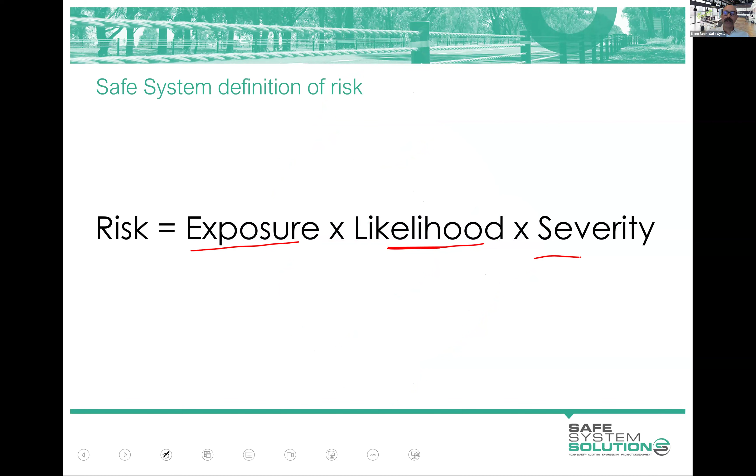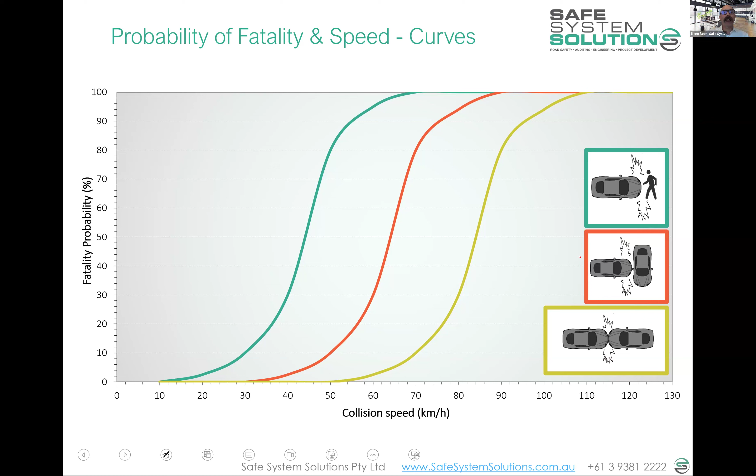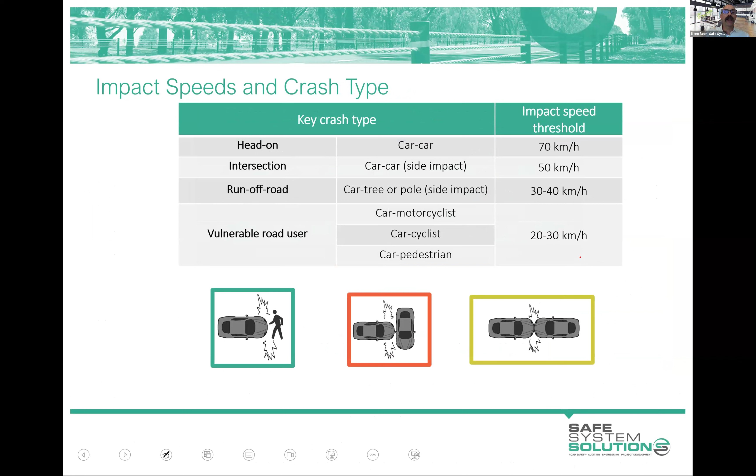When we looked at that severity aspect in my summary, we looked at these graphs and we got ideas of some particular crash types that we were thinking about and how bad they are for humans. And we looked at some different speed angles of vehicle crashes involving pedestrians and cyclists. I've put a few of these at the start of the notes for this module, so you can easily refer back to these as you make calls.

And I also had that colorful chart that we use with some scoring numbers in it, which I will bring up a little later in this module, just to take you back to that, because that's a nice, easy way to start to get an initial feel for how bad a crash is going to be and what we should score it.

So let's get into it. How do we actually do a safe system assessment now? Well, I thought, if Marissa, we have a poll, which is okay if we don't, this was more just finding out, has anybody actually done a safe system assessment before, or have you received one, or do you not know what we're talking about at all?

Is there a poll? It is. Yeah, good. What has been your involvement with safe system assessments? So this may pop up on your screen. If it doesn't pop up on your screen, just write in the chat maybe. How much experience have you had with safe system assessments? From nothing, no experience, what are you talking about now, to absolutely live, breathe, eat safe system assessments, love those, and anywhere in between.

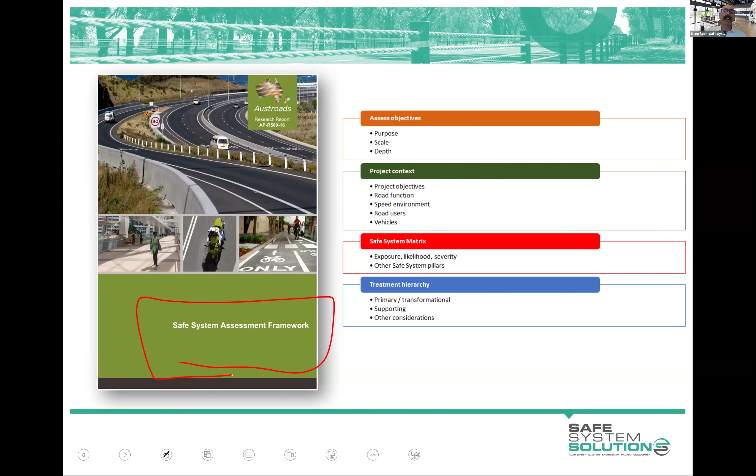Safe system assessments and the process is documented in the Austroads Safe System Assessment Framework, which is a document I wasn't one of the authors of. I was on a working group that was looking at this, and there was lots of different debate about specifics of it, and using numbers or not using numbers, and the like. But in the end, they produced something that hadn't actually been worked through a lot in terms of practical use of a safe system assessment framework, because nothing existed. So yes, they did some sort of mock trials and things like that.

But since the release of that document in 2016, a lot of safe system assessments have been done now, and we've identified some things that probably need a bit of a tweak in this document. There's some industry practice which is slightly different, but generally the document still remains a good source of here's how you can run through this safe system assessment framework.

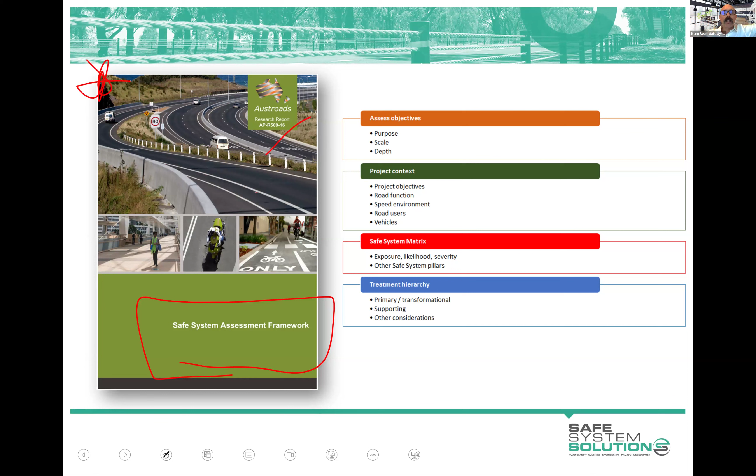So some of the jurisdictions then said, well, thank you Austroads, we like that, and we certainly want to be using it, and we've had practitioners using it for a few years. We're going to put out some guidance to just sit under the Austroads guide, or above it, depending on how you want to do it, just to clarify how we're going to do it in our particular jurisdiction, and clarify anything we don't absolutely agree with the way Austroads says to do it.

So the Victorian government produced the Safe System Assessment Guidelines. Then the South Australian government took the Victorian guidelines and put their own front cover on it, and did a global replace of VicRoads with DPTI at the time, now DIT. Same document, same process, same clarifications, they're the same. So that's become a bit of an industry standard, in terms of from the Austroads document, some particular application aspects. So what I'll be taking you through now conforms with these documents and the Austroads one.

There's been little bits and pieces in Queensland and New South Wales in how things could be done. What we're going to present to you is pretty much industry practice across Australia, and you'll get a template to use, which generally conforms with all of that, so you'll be able to do that for your projects.

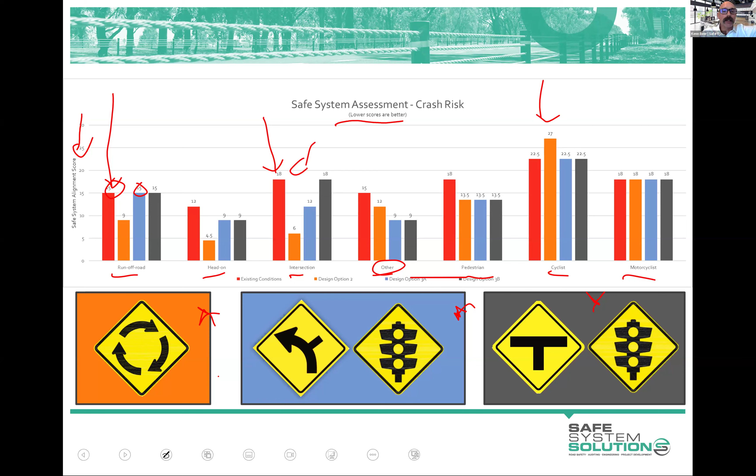So that was what the output is going to be like. Now I'm going to start you on the process journey you would go through to get to the stage of being able to produce that.

The first thing you're going to need to do is sit down with your client and understand their project. Why are they doing this project? What's the current traffic numbers, the current number of pedestrians, cyclists? Have they made commitments to different things? What's the function of the road? What's the speed environment? Are there cyclists in the area? What's the vehicle composition? What's the movement and place categorization? These are just prompt starter questions - these ones happen to be in the Austroads guide. You can ask whatever you want to try to get your head around this project, what they're planning, what they want to achieve, and all of that.

So it's to help you with context. Some of these help you refine your scoring and the production of that graph. Some of them actually help you in the next phase, which is to give them recommendations on how they can improve things. The more you know about their strategic objectives and what they're trying to achieve with this project, the better you can tailor some of your recommendations and things you suggest they have a look into to improve the safety of their project.

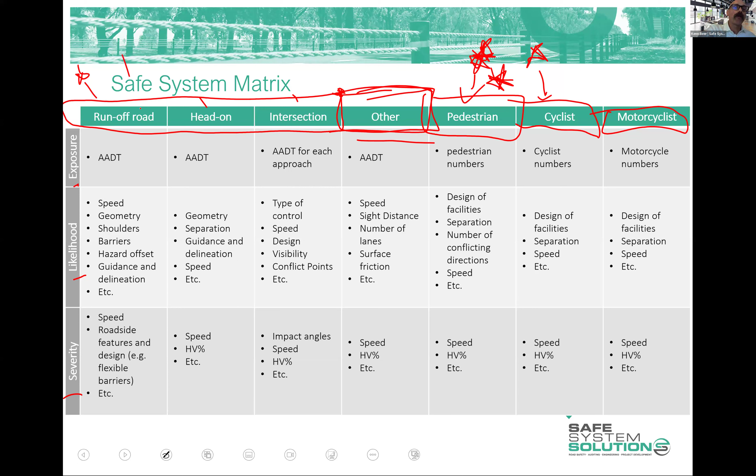The other crash category is to pick up anything you don't feel has been appropriately identified in any of these other crash types. Common other crash types are railway level crossing crashes, crashes with trams or light rail, sideswipe crashes between passenger vehicles, and rear end crashes if they are at a mid-block location.

What do I mean by that? If somebody slams on the brakes on the approach to an intersection and a car hits them from behind, in your imagination of future crashes that's actually an intersection crash, because it's generated from the intersection. But if it's just a pedestrian crossing mid-block or a school crossing, and you're worried about people rear-ending there, then you put that in the other category. Hopefully that makes sense.

So those are the crash categories, the crash types. We want to understand how many road users are exposed to this crash type, what's the chance that crash will actually happen for an individual, and then how bad is it actually going to be if that does happen - what are the actual forces, impacts, death and serious injury we expect as a result.

Now, Marissa, I'll pause in a second just to check if I need to cover anything before we delve into each of the cells of this matrix and start to unpack exposure, likelihood and severity for each of these crash types.

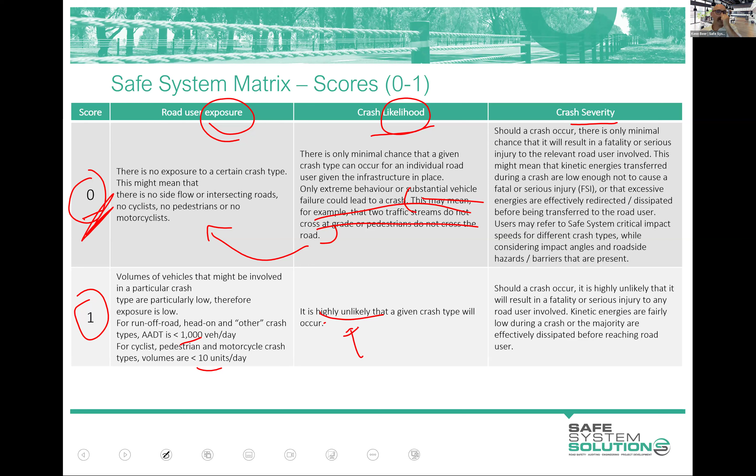So you take all of your thoughts and all the dot points you've put in there, and you jump over here and you debate with your team. Is this unlikely, or is this likely, or is this highly likely? What do you think? And then you end up going, okay, well, we're going to make it unlikely, a 2. But you justify that with lots of dot points.

And I'm going to go through severity now, and then I'll take questions. I see there's a few things coming in.

So after we've done that, now we put aside the number of vehicles, we put aside the chance that a crash is happening. We now say a crash is happening. How bad is it going to be?

And we say, well, what's going to influence that? Things like the speed, what they're going to hit when they run off the road - is it barriers they're going to hit? Are they going to hit a tree? Or are they going to hit a culvert? Or are they going to hit a big long building? Or are they just going to roll over in a paddock?

And then we say maybe, is there any other factors in there we might have missed that are going to make this worse or better? And we go to our scoring reference sheet and we can look at these and read them through. I'll read one of them - I'll read the 4 one.

Should a crash occur, it is highly likely that it will result in a fatality or serious injury to the road user involved. Kinetic energies are high enough to cause fatal serious injury crashes. It is unlikely the forces will be dissipated before reaching the road user. So dissipation of forces is things like hitting a barrier system and running along and slowly washing off the speed, or hitting a big crash cushion, or these sorts of things.

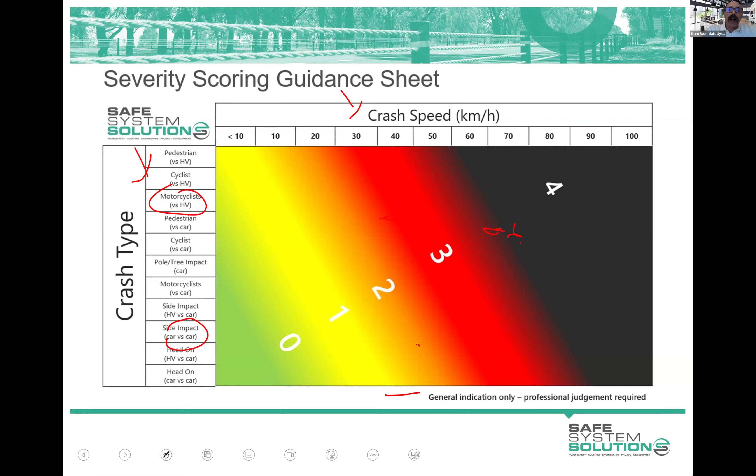You go, well, yeah, the speed is 60 km/h speed limit. Although the 85th percentile speed is actually 64. Okay, and okay, there's no barriers. There are those trees sitting out there, so that's a bit of a worry, and that's going to be much more severe when somebody hits that.

And we're thinking about them running off the road. Now they're going to hit that. They might wash off a little bit of speed as they yaw, but they're still going to hit around the 50 km/h mark or so potentially. Maybe some going a little bit higher than that.

So, okay, I've got trees, power poles, and it's a car. We're sort of thinking about that one. Oh, we're sort of in the 3 range here, aren't we? Somewhere in that 3 range potentially. Maybe looking a little bit further, we want to go slightly either way, but I'm happy enough to give it a 3 for this after that justification.

So you can see there, we've managed to score each of those cells for concentrating and focusing on cars and trucks leaving the road and striking objects.

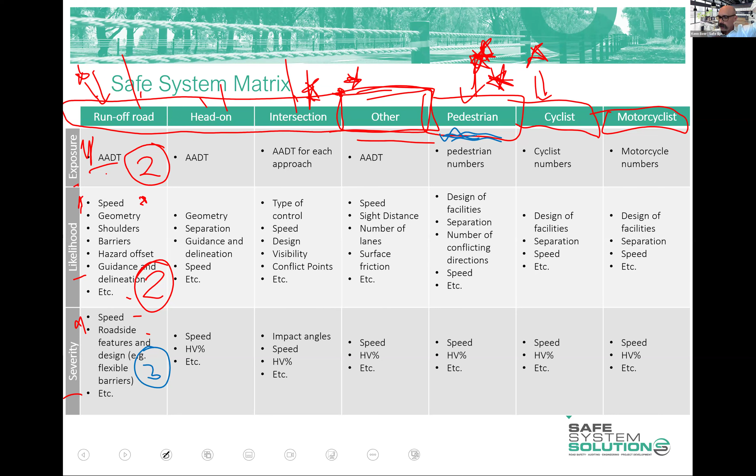Trevor's asked, if there was a bus stop on one side of the road, would you factor in traffic only in the near lane or both lanes? You'd factor it in for both lanes. I mean, that's the AADT, the volume.

Yeah, people are going to leave the road from either lane, potentially. There's less likelihood they will from the other lane because they've got a bit more space to recover and the like. We can trip ourselves up by overthinking this like it's some precision tool for coming up with a precision score. It's not. Think of this just like any other risk assessment methodology—it's just we've broken out exposure into it, and instead of saying high, medium, low, we put numbers to it.

Question: do you conduct SSA solo or as part of the team? I think we'll go through that later in the session, or in the next module when we come back next week. I'll talk to you a bit about that, but really we do like teams. Teams is good, although there's a little bit more flexibility under the Safe System Assessment protocols to do individual ones. We do like teams though.

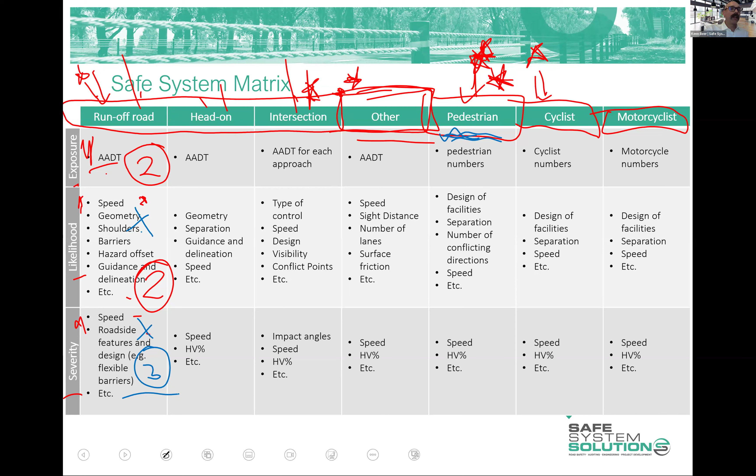With an example such as dual carriageway with central median barrier, would the likelihood still yield at 1, noting that there is still potential for a runoff road, but consequence would be less so due to the barrier? Yes, correct. Yeah, so hitting a barrier we account for in runoff road - that's a runoff road crash. So your likelihood can come up a little bit when you have continuous barrier systems, but you'll see that the severity goes way down, and that multiplies through, because this is what we do.

We go 2 times 2 times 3 is 12, isn't it? Yeah. So that is our total risk score for runoff road.

Now, if you were to put a 0 in any of these, multiplying anything by 0 makes 0, of course, doesn't it? So if you were actually there, it's never going to be a 0 for exposure to runoff road, but maybe intersection - if you don't have an intersection, you put a 0 there. It doesn't matter what the likelihood is or the severity. There's no intersection crash because there's no intersection.

If you are absolutely hand on heart confident that even with humans being humans, there's no chance of crash, you put a 0 there. It doesn't actually matter if that was a 4 and a 4, because there will be no crashes. And this one I put a disclaimer on - but you could say 0 there for severity, when crashes happen, nobody will be killed or seriously injured. We're very confident they're all within safe system tolerances. We don't actually care what the exposure is and what the likelihood is, because in all of those incidents people will walk away from it, minor injury at the worst, and that aligns with the objectives of the safe system.

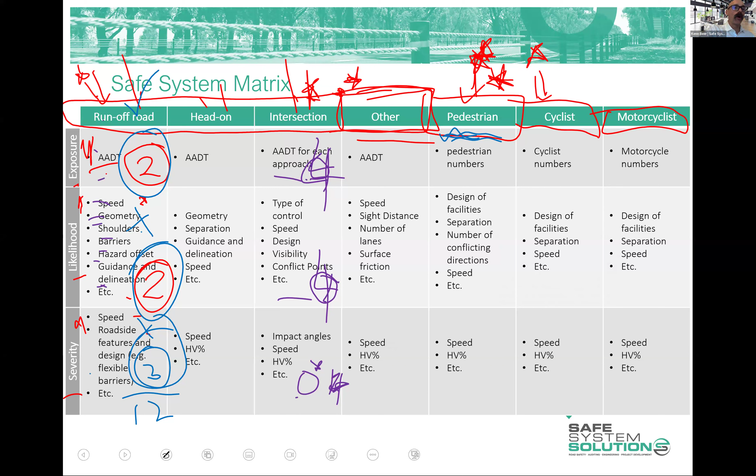You justify it with some dot points and make a call on your score, your risk rating. So you do it for runoff road crashes, head-on crashes, then for intersection crashes. You'll notice the AADT for intersections is actually the addition of both approaches - the volume on one road and the volume on the other road, you add them up.

You do it for other, based on often the vehicle numbers, but you may use other numbers. You do the pedestrians, cyclists, motorcyclists. Again, you may not be given that information - you make a judgment call on it.

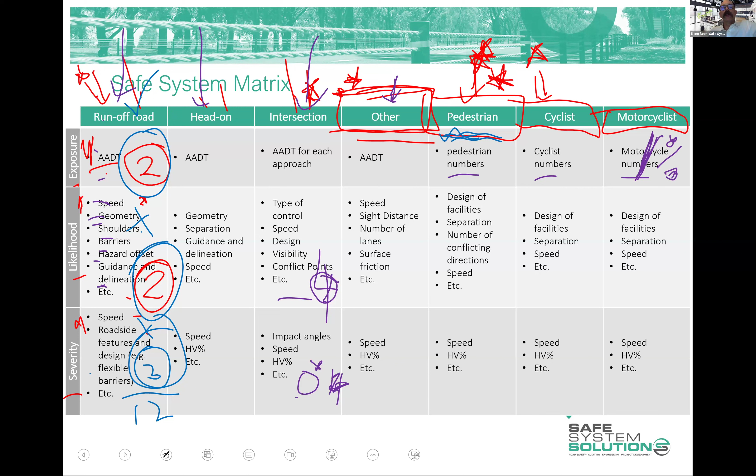Generally we talk about 1% of AADT for motorcyclists, 1 or 2%. 1% is a decent place to start if you're not on a popular motorcycle route. If you're on the Great Ocean Road or Alpine Way, you're probably going to go up much higher than that. But 1% of AADT is a good starting point for most urban road environments or general freeways or highways.

You're going to dot point out all these things for head-on crashes, then intersections, other pedestrians. We're looking at what facilities are there, what's provided, how many lanes are they crossing, what's the speed, is there more likelihood? Cyclists - are there dedicated cycle ways or the like - and motorcyclists as well.

And then we do it all for the severity of incidents. When we've got multiple vehicles, we may factor in, is there a high percentage of heavy vehicles? If somebody head-on crashes, is there a chance they'll crash into a truck, which is going to be worse? What angles are crashes going to happen at? And it's going to be heavily influenced by speed, the angle a bit, percentage of heavy vehicles.

It's not to say we can't have high-speed areas, because we will have ensured the severity of roadside hazards has been addressed to keep that down, or intersections have been designed in a way that you're not getting that severe impact.

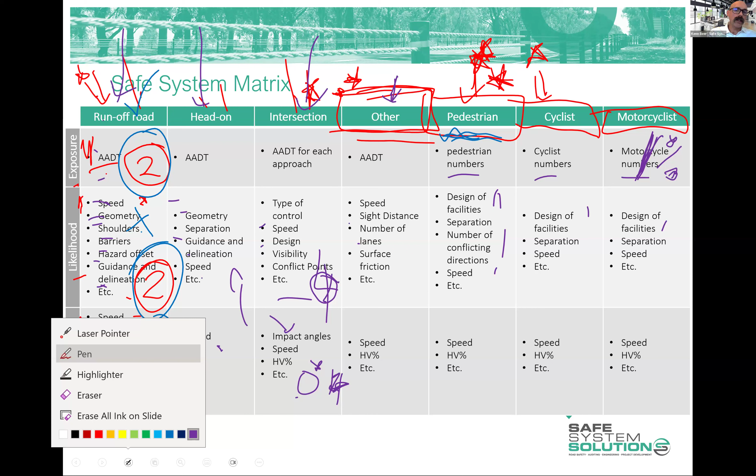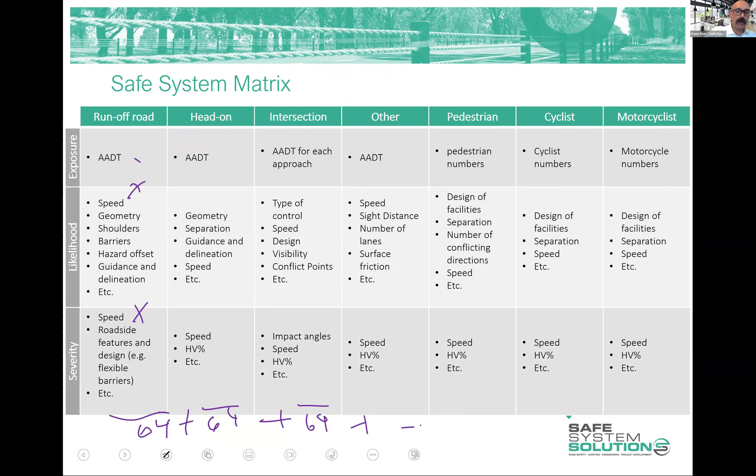So we go through and fill out lots of information in all of these, and then we multiply them through. We take our score here, multiply, get a total score out of 64. And you multiply them down, you get all these scores. Then you can add them up to get a total score for the project, and the total score is going to be out of 448.

A project with perfect alignment with safe system principles has a score of 0. A project with the worst alignment with safe system principles has a score of 448. Everything you assess will land somewhere in between there.

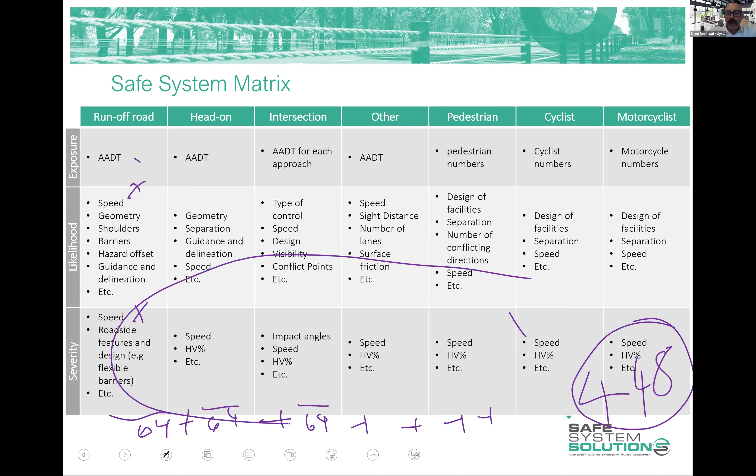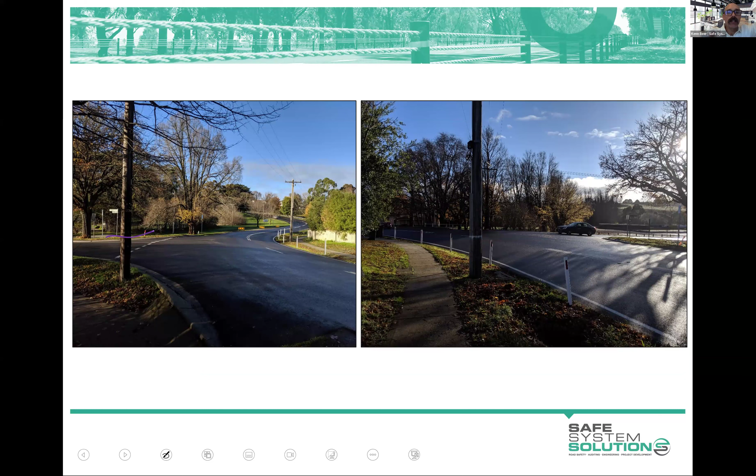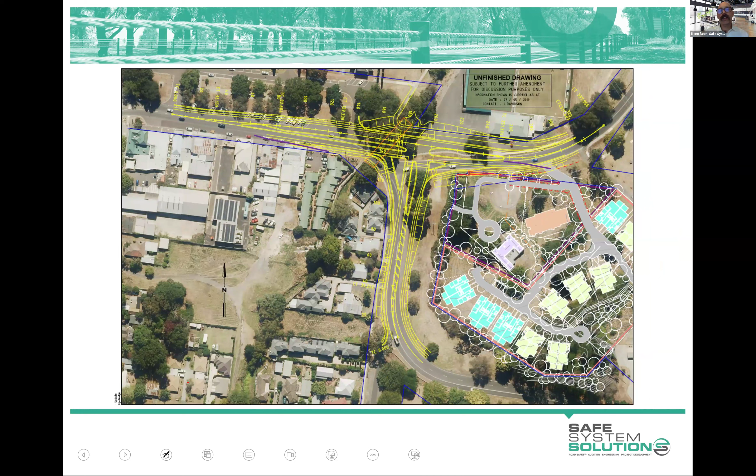We're not going to spend long looking at it, but then they've got a proposal to build a roundabout at that location. There we go, we've got a bit of a concept design, a little bit of how it could look. Then we've got another option - here's like a modified T intersection with traffic signals through here, and here's a conventional T intersection with traffic signals in there as well. So there are three options. When you do that first one, you go out there, look at the site, the existing conditions, and score it all up.

You've completed your matrix, lots of thoughts, lots of ideas in there. You want to get this comprehensive and right, because what you're going to do is copy it, paste it, and then say, right, now if they build a roundabout there, what's going to change? You start to cross things out - that's going to be eliminated, that's not relevant anymore - or new things come up. So it's all based off comparing existing conditions to the new things, and you change it.

You change a score, you change the color of that score. This helps a reader see, okay, our roundabout's going to do all these wonderful things, but it actually brings up some issues we might need to think about. Then you go back, take that existing conditions matrix, copy it, paste it again, and get your next design - you manipulate it, cross bits out, add bits in, change scores, and then do it for the third one.

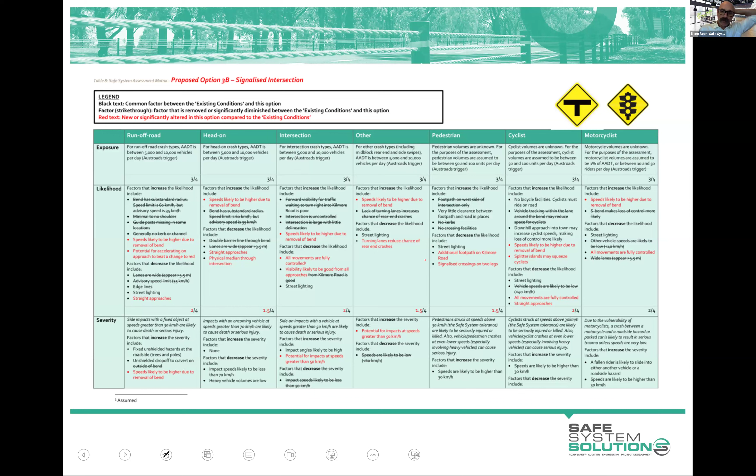Copy the existing conditions, paste it. And if they give you 50 options, you copy that existing conditions 50 times, and you have 51 matrices - one for existing conditions, and one for each of these new ideas they've got. Then you can take all of that and get all your scores.

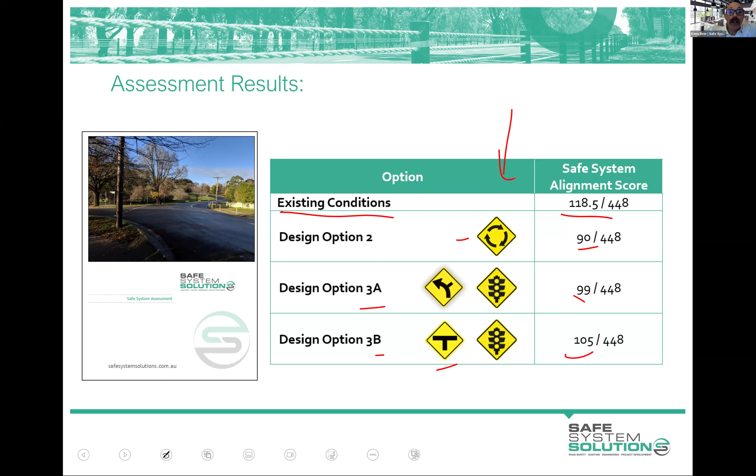You could make a total score. So if the existing conditions is 118.5, your roundabout option goes down to 90, your modified T signals 99, conventional T goes to 105. From that, what we can say is, hey, everything you're doing here is getting us a little bit better alignment with safe system principles - everything proposed, from existing conditions to what will be built, is better alignment with safe system principles. Nothing is perfect that you're proposing.

Of the ones you proposed, the roundabout was best, but it's at 90, okay? And 90 is just an arbitrary number. The difference between that and that is what you're actually interested in, the difference between that and that, and the difference between that and that.

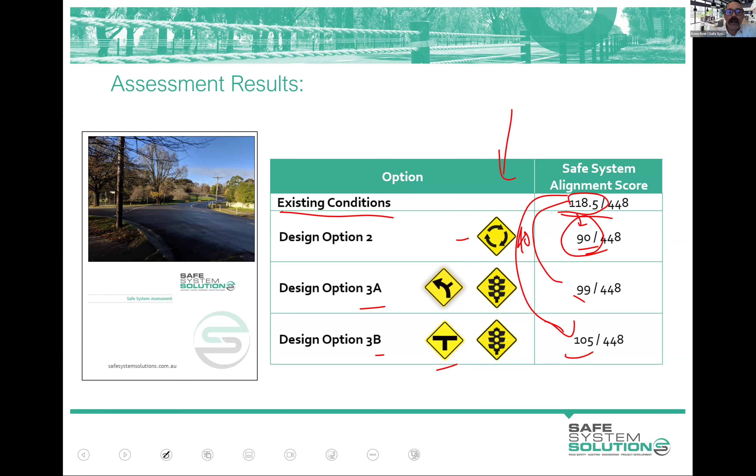So you can present that however you like. But this is where we started, and this is what you've now come to understand - okay, I see how he's arrived at that, and I see what that explains to me in association with the fact that the roundabout was the lowest number.

They might go, great, okay, well, we know the roundabout's going to give us the highest alignment with safe system principles, but we also know that cyclists aren't going to fare that well there, and that's still something we might want to address. And maybe there's some others we want to address.

So then for every proposal they give you - every design, be that the roundabout, this one, the other one, or all of those 50 ideas and concepts they gave you - you give them ideas on how to get these numbers lower. Things that you think of that actually are going to improve the situation. Those are your recommendations - they're not binding, they don't have to do it, but you're feeding in ideas. And that's where you kind of want to know a bit of the context of the project.

We categorize these into primary and supporting treatments. Non-safe system is in here just almost for terminology sense - you're not going to recommend non-safe system aligned treatments, things that make things worse for safety. But primary treatments are really those initiatives that virtually eliminate death and serious injury associated with the foreseeable crash type you're thinking about. Supporting treatments are anything that's good, that helps, that reduces risk, but it's not going to virtually eliminate risk, because humans falling asleep may still face serious injury, or if crashes happen, it's going to be a challenge.

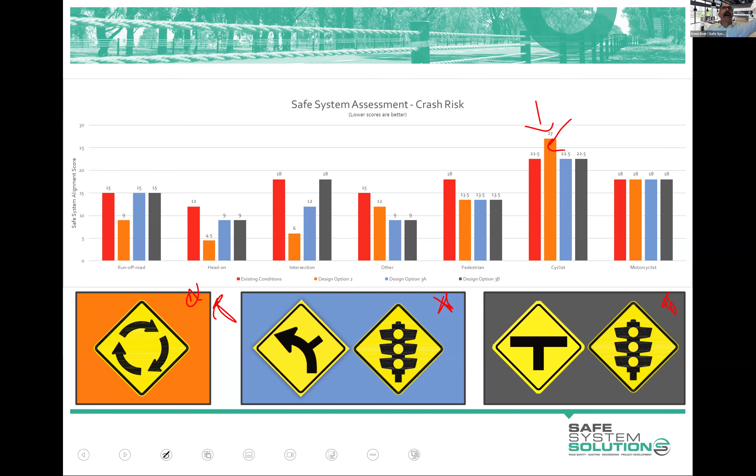I need to stress this with diagrams to reinforce the point. Think of these as buckets of treatments - there's different ideas in there, and you're pulling it out of this bucket. Don't think of primary as your number one idea. You may come up with 3 primary recommendations for that crash type, or you may come up with no primary recommendations and they're all supporting, because they all came out of this bucket. You might say, I can't even think of a way to get a primary treatment, or I just can't think of one that's feasible in that location. So don't think about it as number one - think about it as, that's the bucket. Now I'm taking that one out of the primary bucket, or out of the supporting bucket.

Okay, so that's got us nicely to a point where we've got this matrix filled out. We've got lots of numbers, lots of thoughts, we've got a graph, and some recommendations and ideas.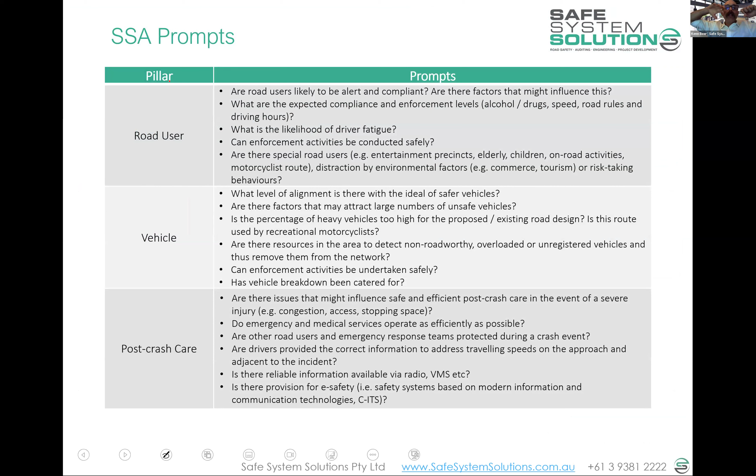The other thing we need to be thinking about are the wider elements of the safe system - the road users, the vehicles, the post-crash care. It's up to you as to where you do this in the stage of a safe system assessment. Personally, if I'm in a Teams meeting with the project team, I'll go through these questions early on, because they sometimes spark ideas and thoughts - people know stuff, they tell you information, and you factor that in. Theoretically though, this can be done after you've done a lot of that. But they're trying to ask qualitative questions about these specific issues - we're not putting numbers to these, just ideas, thoughts, things you've picked up along the way.

Are road users likely to be alert and compliant, and are there factors that might influence this? What are the expected compliance enforcement levels of alcohol, drugs, speed, road rules, driving hours? What's the likelihood of driver fatigue? Is this in the middle of nowhere, between two towns, 5 hours from Sydney, or are we talking about the centre of Sydney? Can enforcement of these activities be conducted safely? Are there special road users - entertainment precinct, elderly, on-road activities, motorcycle particular route, distraction by environmental factors? Are there any wider things we need to know about from that safety perspective?

You're writing lots of little dot points under this, and they sometimes elicit recommendations to the project team. Or sometimes you go, actually, I'm seeing an amazing amount of elderly people here - I wonder whether our severity scores need to go up a little, just because of the frailty of the actual people crossing the road here. It'll take a fair bit to actually jump that up, but if you're connecting the aged care centre to the shops with a crossing, you might start to factor a bit more of that into what you're thinking.

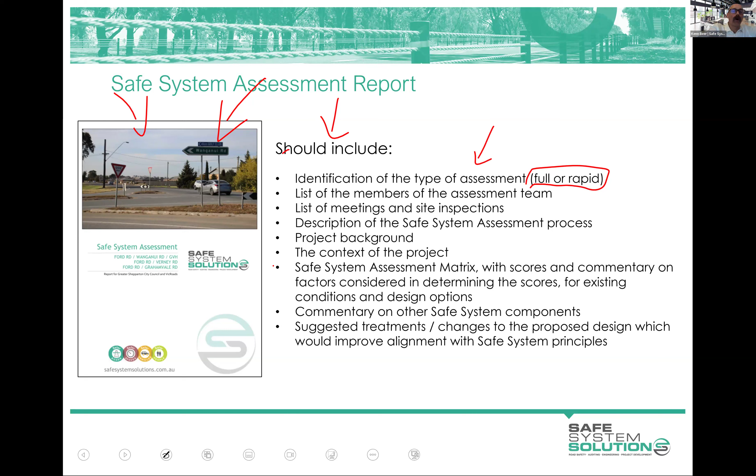And this is the template, part of the template. We're using the template, admittedly stripped down a bit. We left things we don't want you to do in there, we just crossed them out. The reason for that is if you want to actually use this template, you can just unstrike through them, or you can download these templates from the Victorian Government website anyway, so you can get your own one.

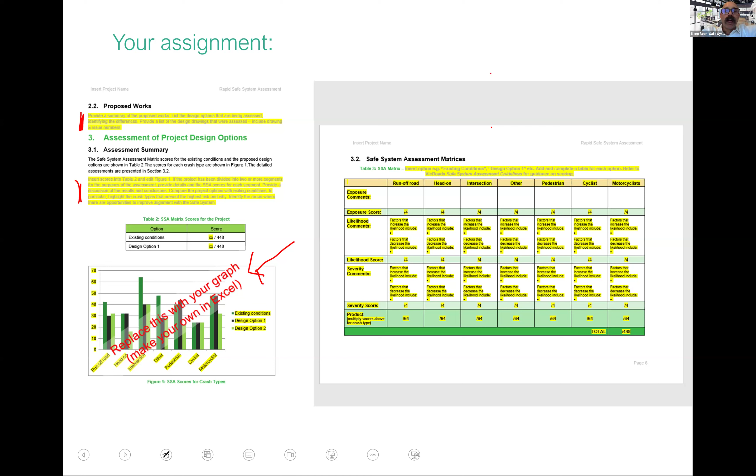But what we're doing for the assignment, and Marisa's going to jump into the learning management system and show you this shortly, is anything that's highlighted yellow, you are going to have to complete. You're going to have to create your own graph - I think we've even given you a nice little Excel graph generator, not that you couldn't all make that yourself in 5 minutes, but maybe just make life a little easier. And of course, the matrices, and you're going to fill out all of that information.

Before I hand over to Marisa, I just want to talk about the safety of yourselves at the sites that we're going to tell you to go to.

We have reviewed each of these sites. We've risk assessed them from an occupational health and safety perspective. They are very low risk sites, as long as you are sensible. It's about going to site to observe how it all operates. It's not about measuring lane widths or anything like that, okay?

You don't need to be on that road. You can stand back safely, observe, have a look at the site, take some notes, get some ideas, look at your design. Say, oh, I wonder how that will tie into that area. Okay, pedestrians seem to walk, they like that crossing point, but the crossing, this one's over here - how's that going to work? That's what you're doing. Don't spend time on the road measuring or putting your head down or look at things or anything like that. Wear your high-vis vest.

All right? Try and stay off the road. Don't be a hazard yourself. Don't make people walk in traffic to get around you. Don't park in places that make other road users at risk, blocking sight lines, pushing cyclists into traffic areas.

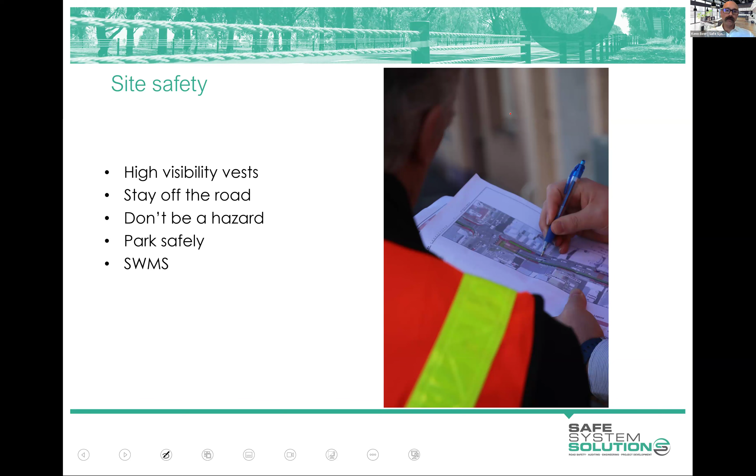At this point, Marisa, I shall hand over to you to take us through the learning management system, show them where they can download their template, find their site, fill out their SWMS, and then hopefully we'll give them 15 minutes at least or so to get started on all that, check the site's appropriate for them in close by, and if they have any troubles, they'll be able to get in contact.

Yeah, no worries. All right, you can see my screen. Yes. We've got module 4 here on the LMS.

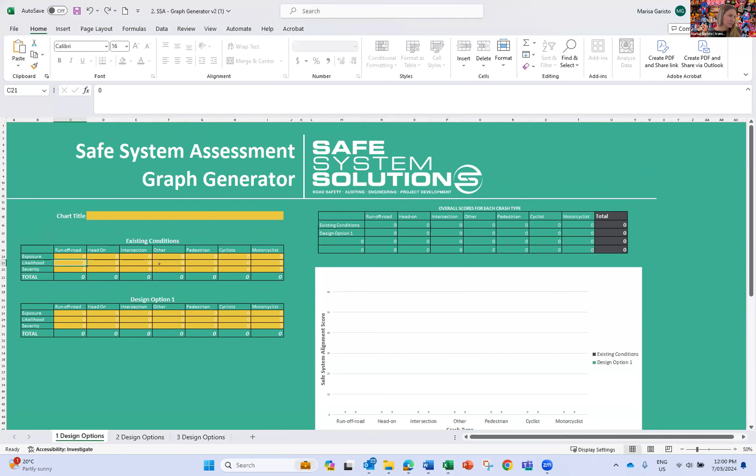Here is the graph generator that Ken did just refer to. We've got a bit of a graph generator there to help you out. All right, there that is, so that's handy for you. You do need to use that, just popping in your figures there, and that should, okay, I'm going to enable editing, so just popping in your figures there, and that should, probably not popping it into the right places, but that will work for you. Bit of a graph generator there for you.

Okay, the sites. Again, we've got a whole bunch of sites here for you. I've got one I can show you. There's just a bit of an example here of the site. Is there anything you wanted to talk to with that one, Ken?

Oh, I think it's just reinforcing a few things here. Your job is to do a matrix, as you will see shortly when the template comes up, for the existing conditions. And then you can see here, they're planning to signalize their site, it looks like, right? So you'll then assess that as it's designed. Now, they're at a very conceptual level, you're not going to get enough information. Like you're going to want to ask, what's the lane widths, or what's the signal phasing, but you're not going to get that information. So you just sort of make assumptions and judgments.

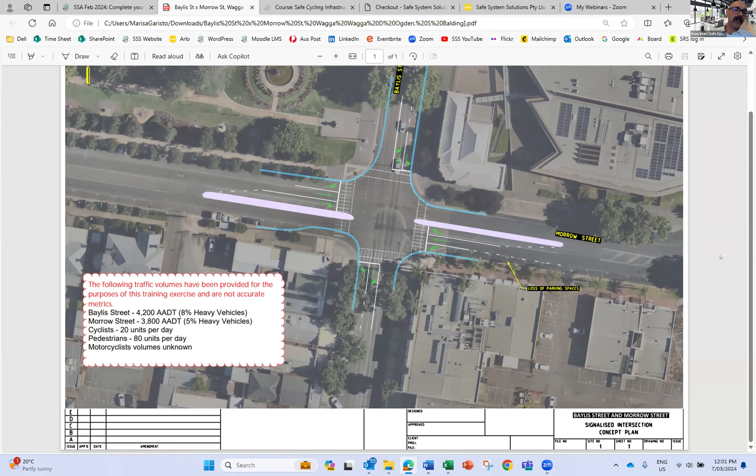You can see there that some AADTs have been provided. Sometimes there you can see motorcycle volume unknown. Well, you might have to remember back to what I said about motorcycle volume.

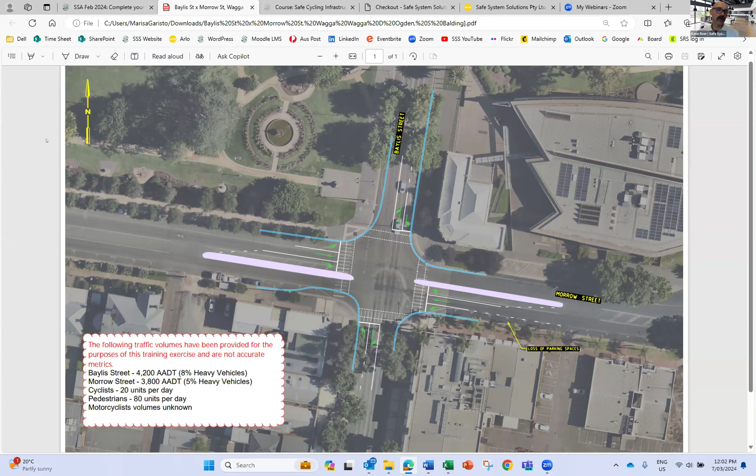If you are given an unknown, you'll know the site probably quite well, and you might even go, oh, those numbers don't look right. Well, don't worry about that. This is part of the exercise, that you use those numbers, because when you're being marked, it's a check that, okay, do they understand how to use the scoring reference sheet, take numbers from here, find the correct score and give the correct score to that. Don't get overly concerned about the particular movements and how many are going here and there, because that's, again, starting to get too precise with the tool itself.

Yeah. So then we go to the Word template here. So you just click on the Word document and open that one.

And this is the document itself. So as Ken has mentioned, just go through and complete all the sections highlighted in yellow. I'm going to go through this, Ken.

Pop in your name there. Are they allowed to complete this as a team, Ken? We need an individual assessment submitted. I'm happy enough for you to go out there with somebody else and have a chat about it, but we need your own unique assessment to come in. If we see two assessments that are identical, we'll be sending those back.

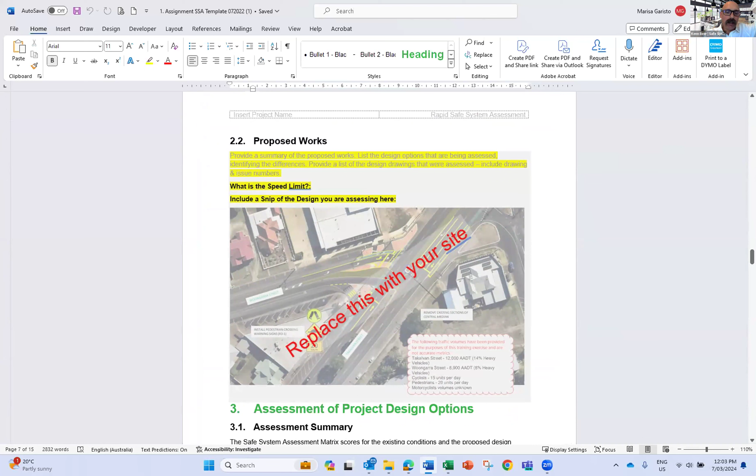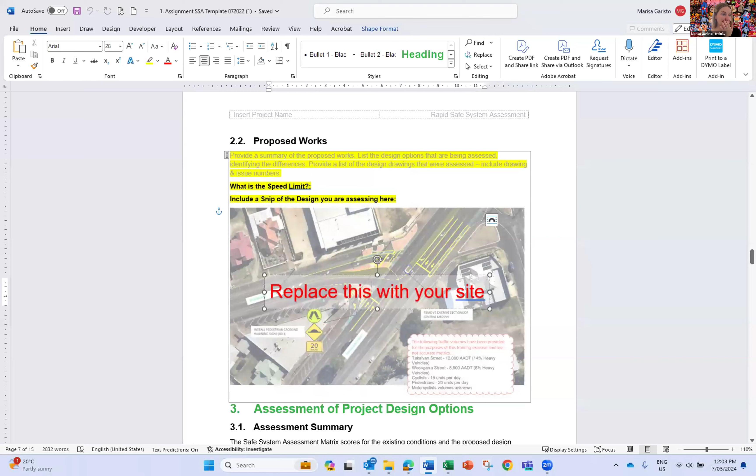We've got the sections that you need to complete highlighted in yellow, so replace this with your site. I'll just continue scrolling through. Ken, is there anything you needed to chat to in particular?

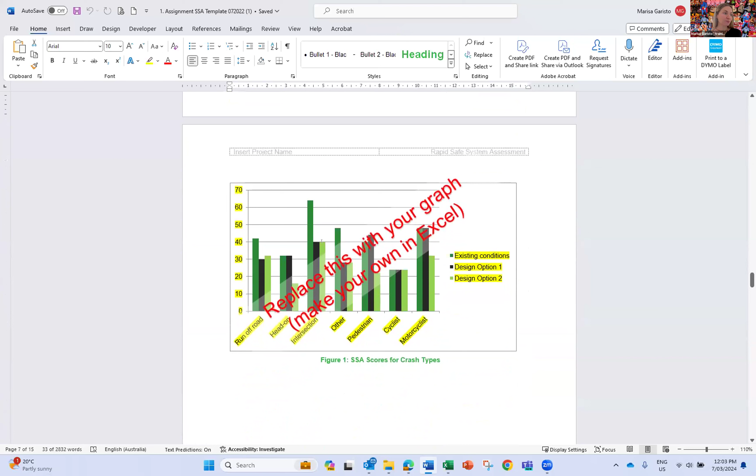The graph you'll put in last, because you need to do all your matrices and everything to then be happy with your numbers. You plug them in a spreadsheet, copy that. You'll see this one is just a little bit different to exactly what I showed you, because it's broken down. You've got two scores to put there.

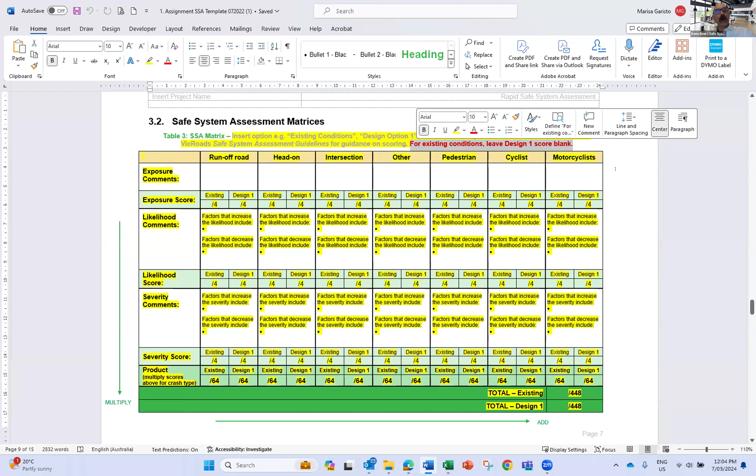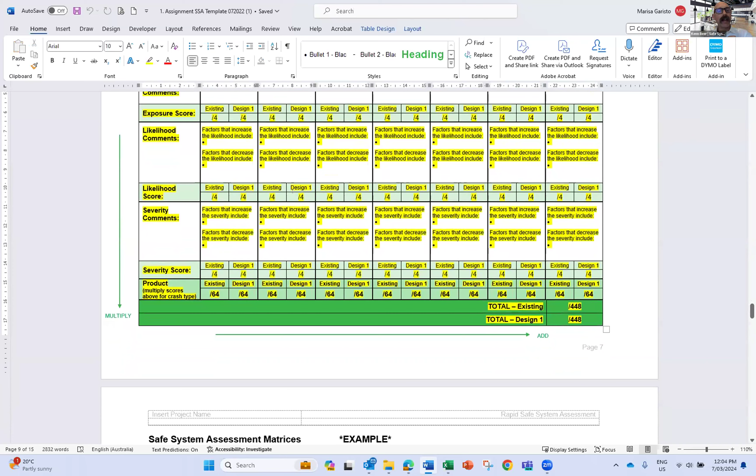Existing conditions - you'll first of all do this as an existing condition. There'll be nothing scored in design one, so you can see it's in red there. For existing conditions, leave the design score blank, right? The reason we've got this is that you'll copy that matrix after filling everything out, except for the design one score. When you paste it, you'll manipulate it and be able to put in the design score. So here's an example, all right?

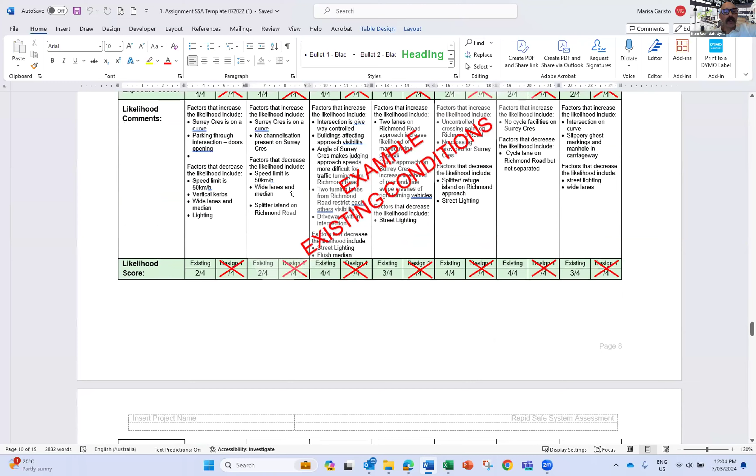Existing conditions - see, they haven't done anything in the design score. But then you go down and you'll see, have they done a design example? Maybe not. Yep, okay, example design - now you can see the design score appears. The reason for this is the markers want to be able to check what you're changing and what the reference score was in an easier manner.

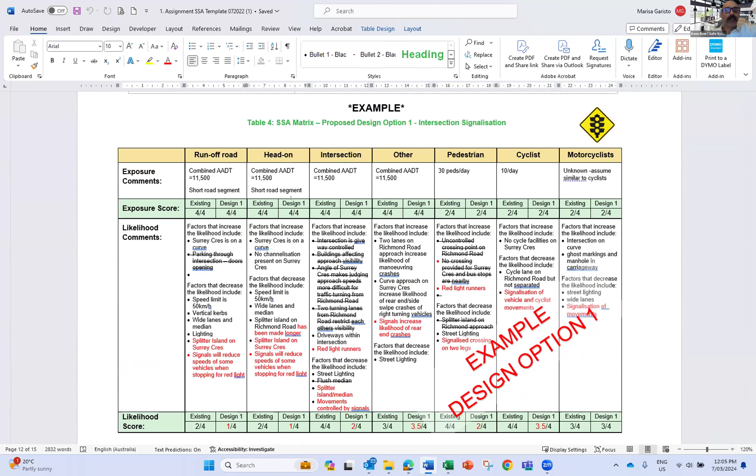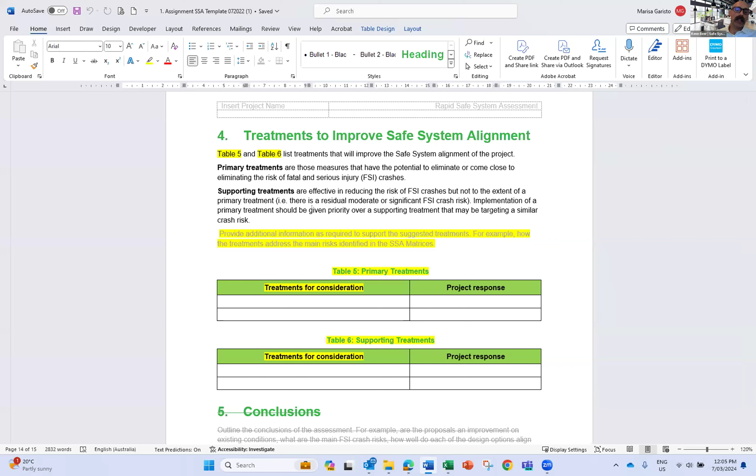So we've given you examples, okay, so you'll be able to do that. Then you make recommendations - you say here are some ideas that will improve things. These are primary recommendations, and the second table is secondary recommendations, table 6. You don't put anything in that project response. Our practice is we do it, and then a project officer can take it and write their own response in there.

I need to stress this - too many people write in that project response column, but you are not the project response. You don't fill out that column. It's not highlighted, don't do anything, leave it blank. That's what we do - we hand over, and then somebody, a project team member, would make responses: yes we'll do that, no we can't do this, instead of that we'll do this. That's for them to use, it's in the template.

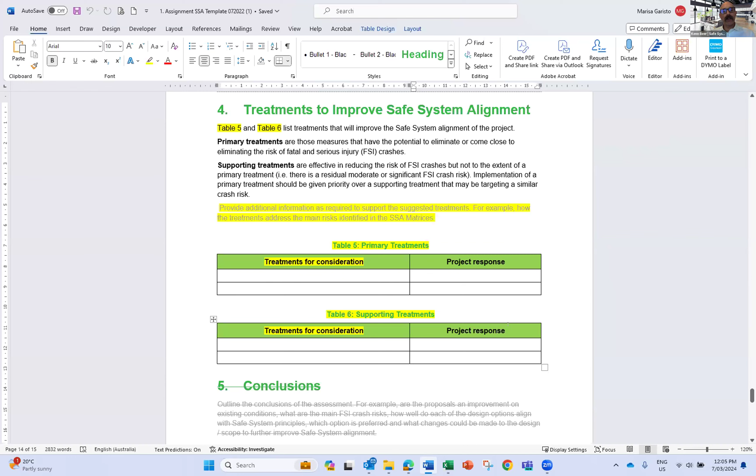In a real safe system assessment, you probably got lots of photos of the site and different things and different approaches and all this sort of stuff, but for the purpose of this, just give us that one photo - show us you went to the site. I think that's probably it, isn't it? I think that's it.

Does anybody have any questions on the assignment? We've got a question with cyclists, pedestrians and motorcyclists - is this the total, and we assume a breakdown?

Yeah, as I say, you can make some assumptions like that. It's generally going to be the crossing - like for cyclists, it'll be the number that are going through the area. So really for this, I would just take simply that number that you're given, look at the scoring reference sheet, and allocate that number in your matrix. Just keep it simple like that.

Okay, we'll give it a couple of seconds if anybody else wants to type in a question, or you can pop your hand up if you want. I think that's been described.